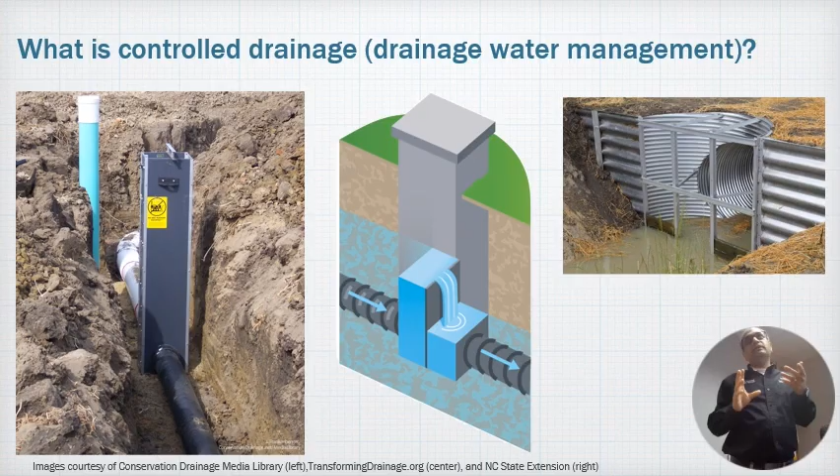In recent years, I think they're actually investing into it because they see the water conservation benefit. Something you might come across is that one structure at the outlet may or may not help. You may have to have a series of structures, and there are two ways to achieve that.

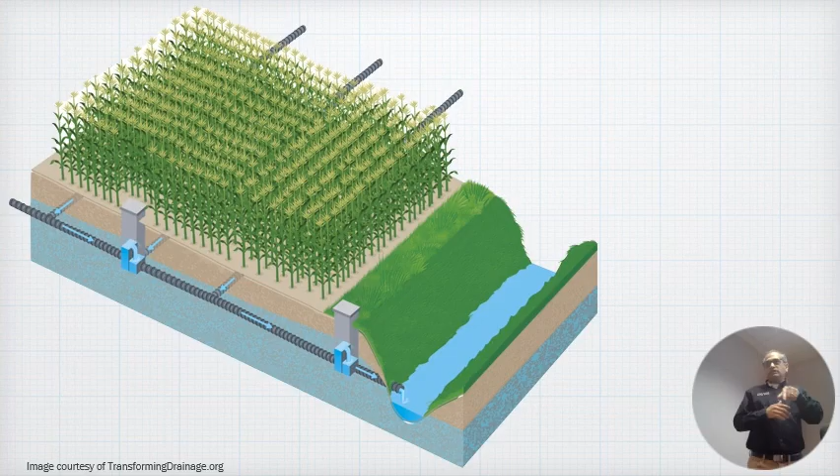You could use a structure, or you could use an underground device they call an inline water gate - basically a float-based valve system. So technically, in this slide, this did not have to be a structure sticking out of the ground. You could put an inline water gate and still achieve about a foot of elevation gain on the water table that you're storing behind it.

Does that make sense? Now, where are you talking at? If you point on the screen, I can't see where you are. Oh, it's not showing up. Yeah, okay, got the cursor - sorry, my bad. There you go.

This second structure - you must have a structure at the outlet basically, right.

Raise the outlet elevation to whatever depth you're wanting it. But if this ground is sloping, then you basically lose the benefit of that raised water level by the time you go up in elevation. And that's where you need to put another structure that would stack up more water behind it.

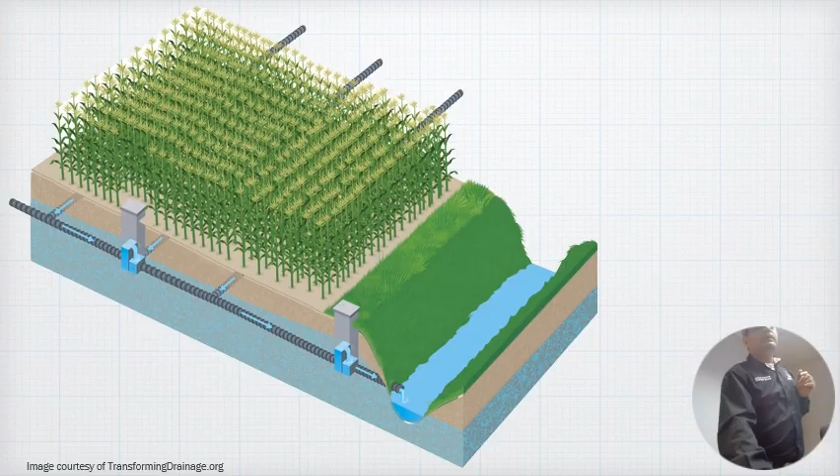To benefit this part of the field, instead of this structure sticking out, you could put a water gate here. Now the difference between a structure and a water gate is that the structure, you can stack up the boards to have like 2 feet of elevation rise. The water gate gives you only 1 foot, so you will need 2 of the water gates, but the advantage is they're not sticking out above the ground.

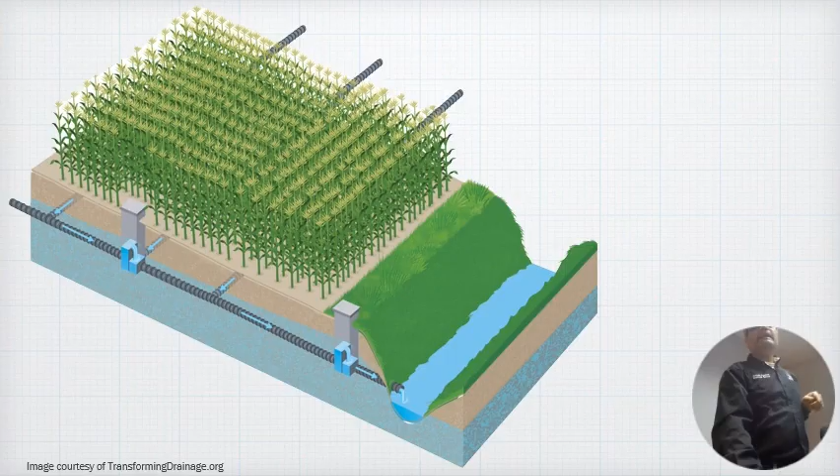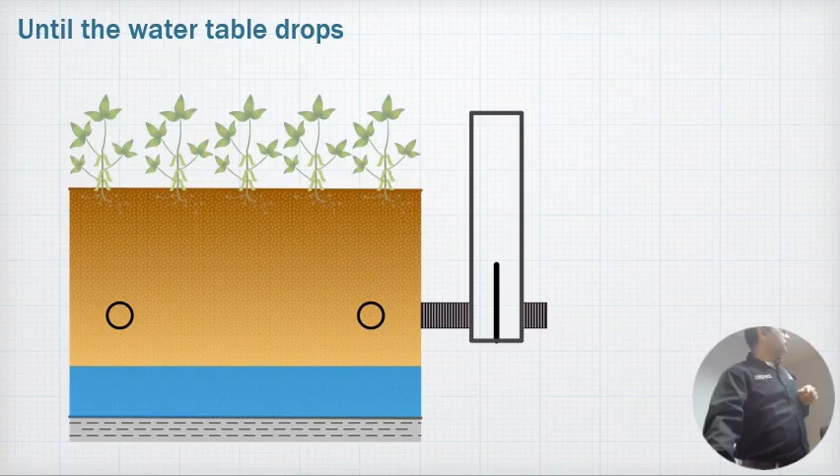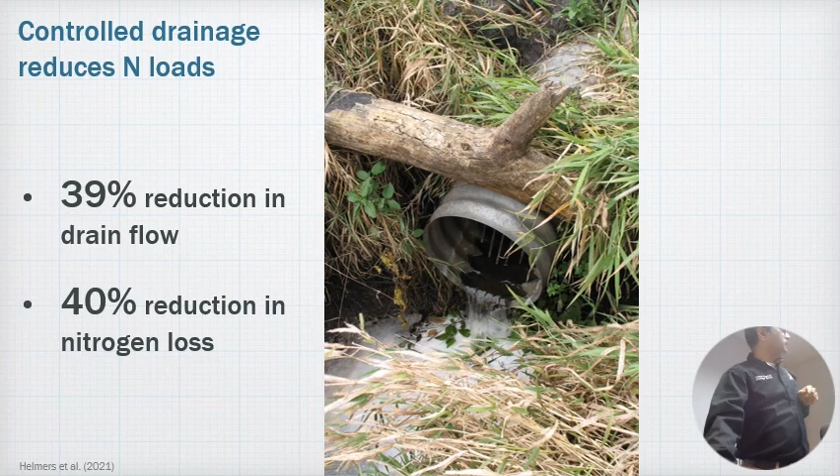And you'll see why I'm showing you that, because it's not always like you're always dealing with a field where the structure has to sit out at the edge of the field. Sometimes your main or sub main runs in the middle of the field, and how do you manage that?

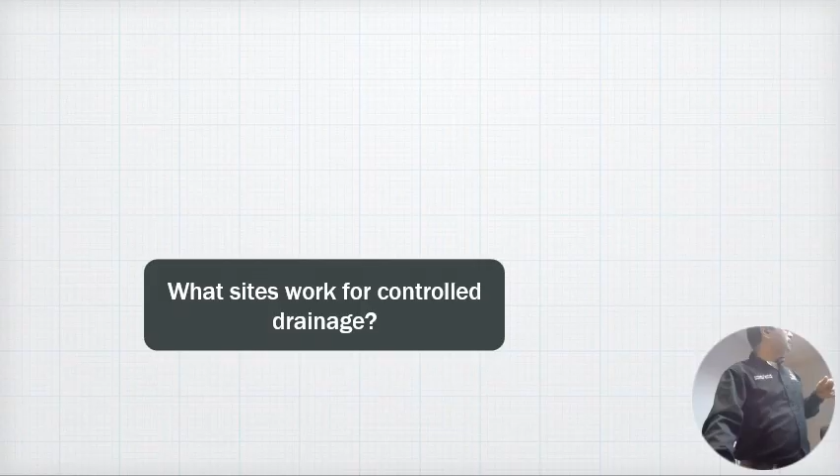What sites work, I think you already know the basics of it, but let's go through the list. You must have drainage that exists, systematic drainage that exists in a field for your water table to actually rise or go up and down. So if you don't have any laterals in a field, you're not going to benefit from controlled drainage. That's the first thing, but it's best to have a pattern drainage system.

Something to keep in mind is, do you have leakages? Old clay system that is hooked up to a different outlet or just sitting there. Imagine you raise the outlet and you have a leakage. It's not gonna store the water in the profile. The whole idea is to store the water in the soil profile, but it's gonna find its way out.

You have a big ditch right next to the field. Deep seepage, lateral seepage is going to take some of that water away from you. So you don't want to have a perforated main running parallel to a big ditch and then do controlled drainage on it, because then you would lose a lot more water to that drainage ditch through seepage, as long as the water in that ditch is lower than your field elevations, if that makes sense.

So there are certain considerations that you have to think about. It's about management, so we have to think about the management aspect. If you could put a structure here right by the road, that's easy to manage, hop off the truck, that's the right location to do it.

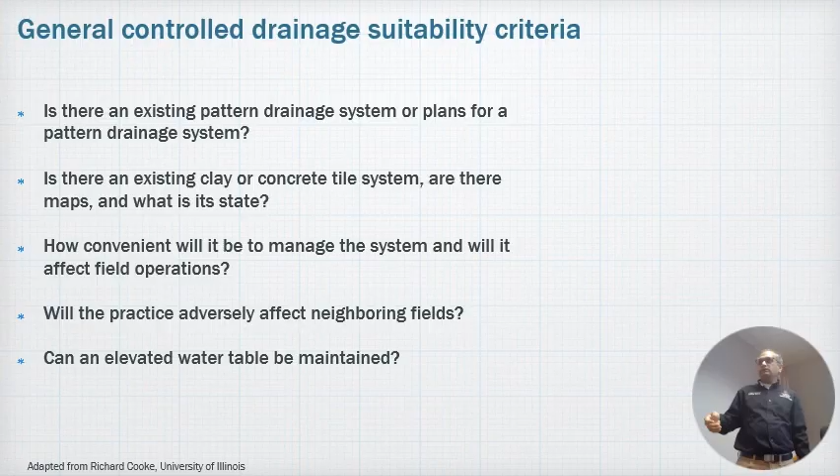And then you have to think about where that location could be. Main thing is, it does not have to come in the way, like when you're turning your combine or whatever, you're likely to hit that. And now there's the consideration of where it says to affect neighboring fields.

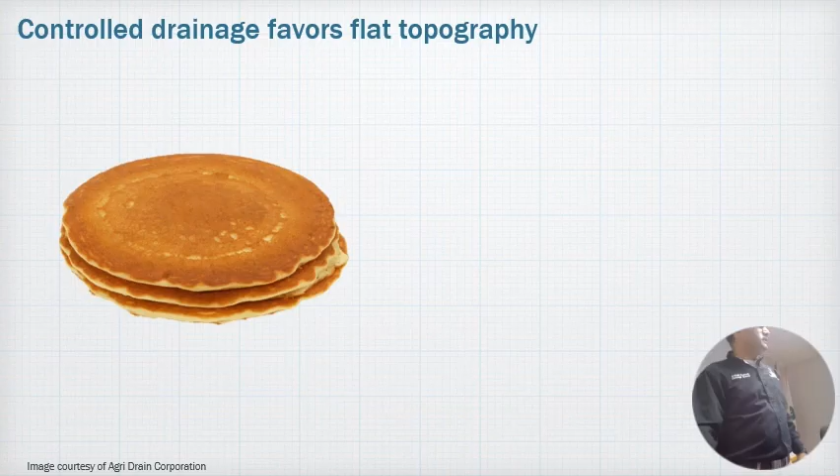Yeah, I'm listening. The neighboring field, I guess we got a main coming through from the neighbor field. So we would just leave theirs there and just go on each side of that, would that be ideal? That is a very good question.

Do you put a control structure on a shared main? My advice to you is to never put a control structure on a shared main, no matter how close a friend you've got there. We always recommend that if you have your own tile main coming in, or if it's not coming in, it's very easy to put a sub main in and then put your own control structure on there. Water is a very contentious issue, and tiling, getting rid of water, is even more. So it's better not to plug up the entire flow for you and your neighbors, no matter how high they are in the watershed. It just keeps your system safe.

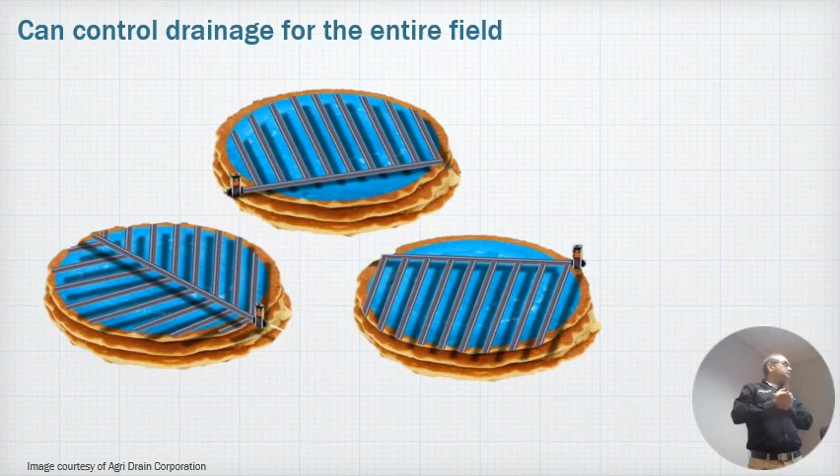Now, with the neighbor's main coming straight through mine, and then I put one on each side, well theirs really needs to be solid or non-perforated, because with me backing it up, my water is going to have a tendency to go to theirs. So that is a modification you will have to do if you have a shared perforated main, and then there is a control structure right next to it.

You will have to change all of that into a non-perforated section. Otherwise it would defeat the purpose, especially on the main, because that's where you're backing most of the water up to get to the laterals. That is a very good point. And then you don't want to have your main be perforated for a certain length.

From the control structure up, you also want to use a non-perforated pipe, because that main - sometimes you're relying on that main to be your drain pipe for that buffer. It may be easier to put another lateral, maybe split the spacing, put another perforated pipe, but keep your main non-perforated if you have another main right next to it that is perforated.

Think about this: a pancake field is perfect for controlled drainage - we have a lot of those. But a stacked pancake field is a different problem.

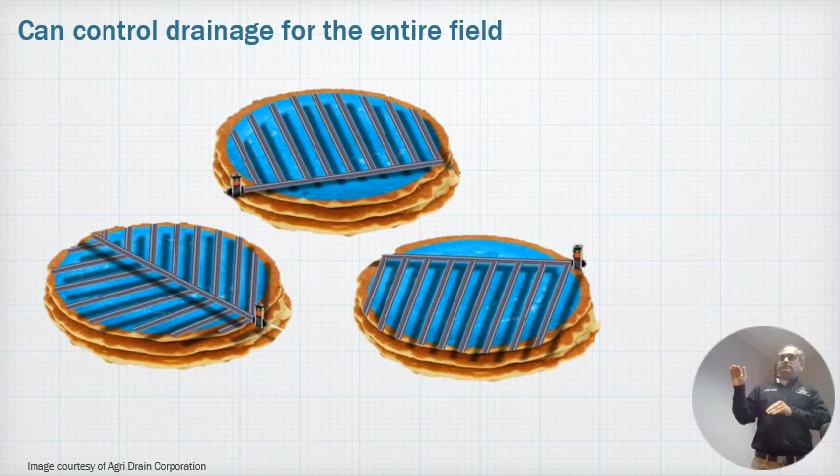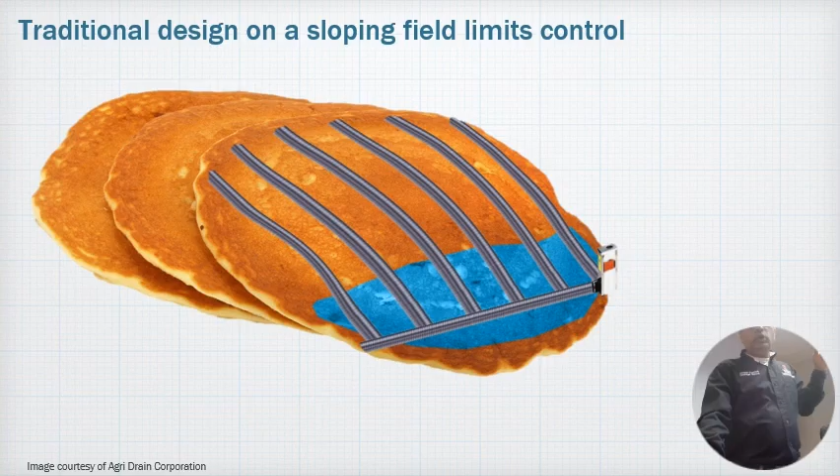That's when you've got to think about whether or not stacking these control structures makes sense. I'll come to the slope numbers shortly, but anywhere between 0 and 1% slope, I don't worry about it for the land. But you could potentially extend that benefit further uphill if you put additional control structures that individually manage these zones.

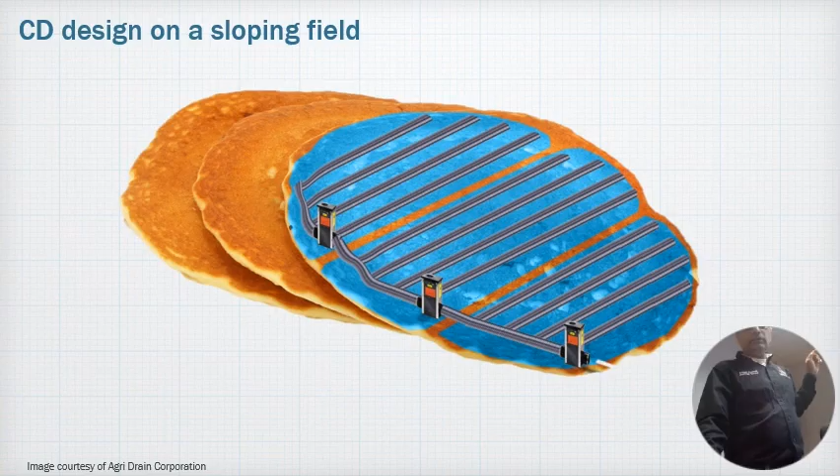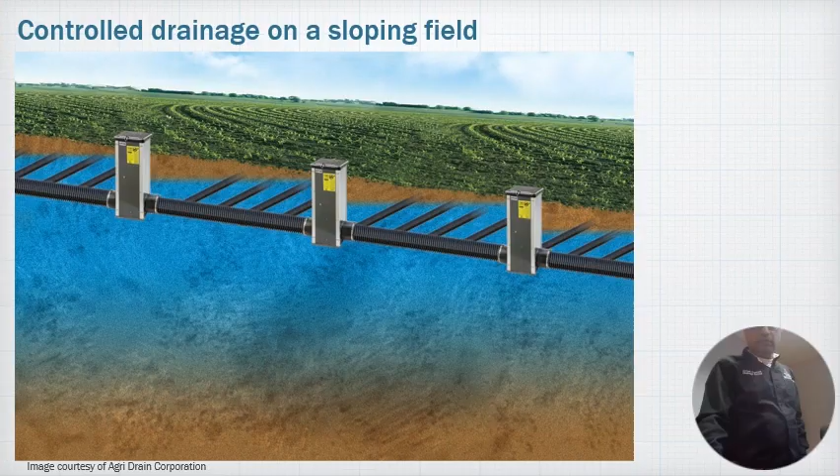I would not want to see a structure sticking out of the ground in the middle of the field. You could achieve it using a water gate - I'll show you that here. But for the pancake side, you could use the below-ground option. I think it may be here somewhere in the illustration. Look at that, there you go.

The difference is, it's basically an oversized pipe that allows you a foot of head. So you would have needed only one control structure here that would give you 2 feet. Instead, you need two of these, and they're much cheaper, but most importantly, they're not a hassle sticking out of the ground. Cost-wise it's all the same, and if you're going the NRCS route, it's all paid for.

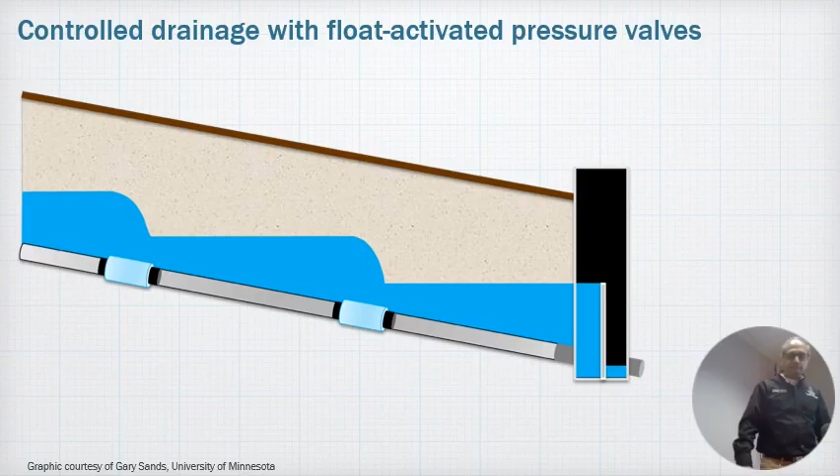And they do work. A lot of people think, oh, it's underground, what if it's clogged or whatever - I don't think we've seen that much of an issue with these, so it's pretty reliable from what we've seen.

As I said, at 0.5% slope, less than 1% slope for a field, you can easily put a control structure out there and see the benefit. The only caveat would be if you have sand veins or some kind of leakage - you've got to address that.

If you have a random clay tile - it's good for me because that part of the field I always liked to have it drain using that clay tile in a different direction - not anymore. You might want to address that through a systematic pattern, or hook it up with your existing system and disconnect it completely, destroying it completely. Otherwise, it's going to leak water.

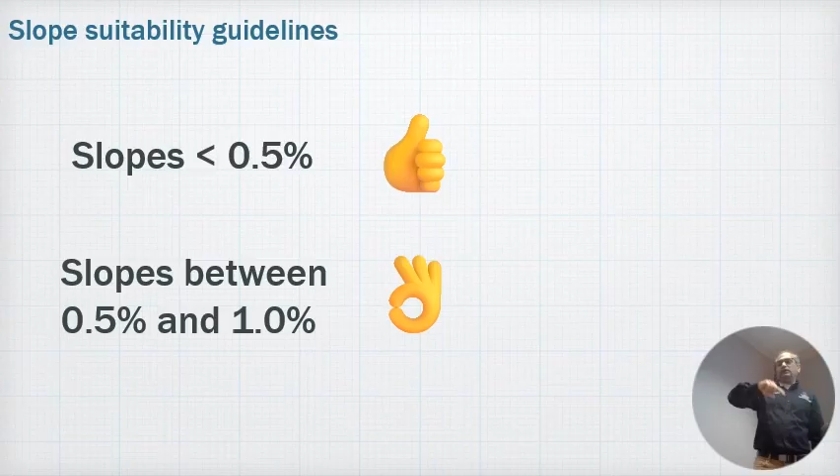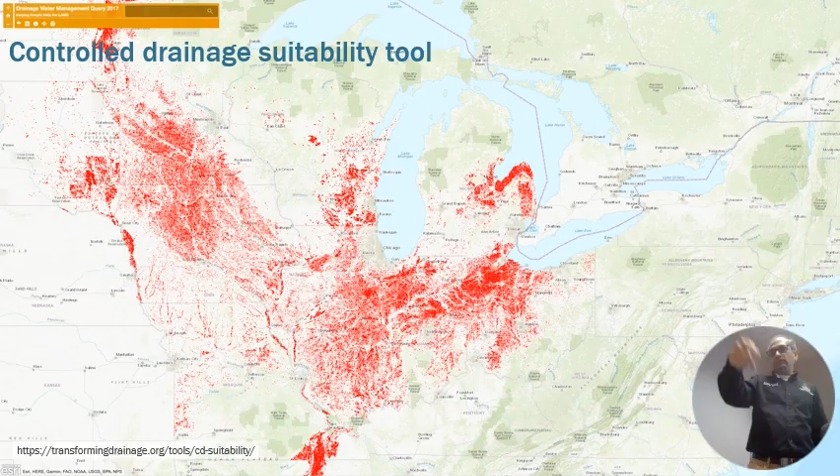A lot of the landscape here is suitable. There is a suitability tool on that website, on that handout, that you can easily see. But honestly, the best way would be to do your assessment, get a soil and water district person to comment on it, and then invest in controlled drainage.

Don't just invest into it randomly. Sometimes you may get into situations up in Fulton County - we see this a lot - where they have sand veins and still get paid for a control structure, but it's no use... I mean, okay, I shouldn't say that - they're not getting much benefit, but they are helping the environment.

As soon as you close that gate and stack up the boards and let the water stay in the soil profile, even if it hits a sand vein, it does wonders for removing nitrogen and phosphorus. On your profitability side, it does not necessarily provide that yield benefit. So the correct way of saying this is: you don't want to invest into this just because you want to make money.

If you're a more conservation-oriented person, you could think about it from that perspective - the benefit, if you're getting paid for that structure, is for it to work for water quality, and it's an honor system. NRCS is not policing you. The payment is not tied to verification that you're actually managing it. It's an expectation - H2Ohio requires you to manage it for 3 years after getting paid. I haven't seen them policing it. It's one of those things that, very American in my opinion, is an honor system.

I'm done harvesting. I have no use for that tile system because I need active drainage if I'm growing crops. I don't need drainage if I'm not growing crops. Shut that valve off by putting the boards in during the non-growing season. It's helping the environment, if you can keep that in mind.

Now, in the growing season, you're still just leaving the boards up part way. You're not closing it fully. The only difference is more aggressive. You'd go higher in non-growing season. The operation and management is part of this, but I'll just explain to you, and then we don't have to worry about the slides.

After harvest, you go back in, stack the boards up so that the water table, when it starts rising, can come up to about a foot within the top of the surface in the field. 12 inches below surface is what NRCS practice standard recommends in non-growing season.

Because you could bring the water all the way up to the surface, but then next time you have rain, you're going to see erosion. So that's why we leave about a foot of freeboard in the field so that rain, precipitation, or snow melt can soak up, find its way, infiltrate, and then bypass through the tile system. But 12 inches is ideal in non-growing season because that's when you have the maximum water quality benefit.

I'm a cover crop guy. I don't want wet feet for my cover crop as it's growing. The practice standard then modifies the suggestion. It says, as the cover crop starts growing, start lowering your water table. I made it simple: for Ohio, don't put it at 12 inches if you have cover crop. Set it at 18 inches. Your earthworms will be fine.

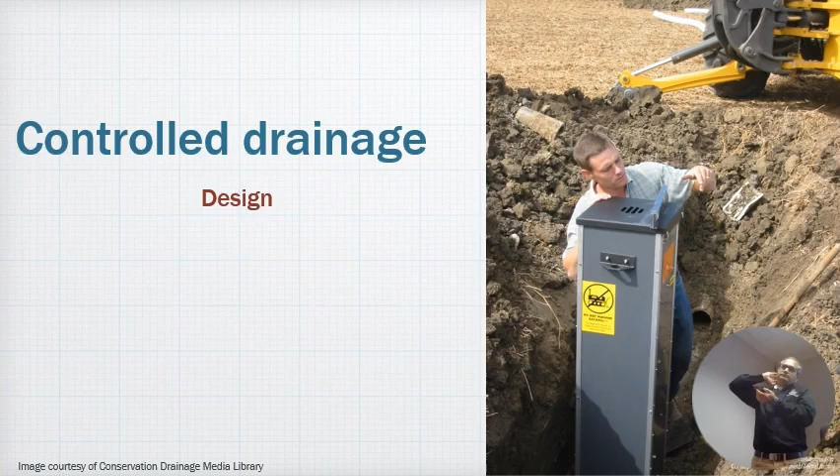With controlled drainage, you're bringing the tile depth up. So instead of going down to 36 inches in the first 48 hours, it's going to stop at 18 inches, or 12 inches, or wherever you set it up to be. Does that make sense?

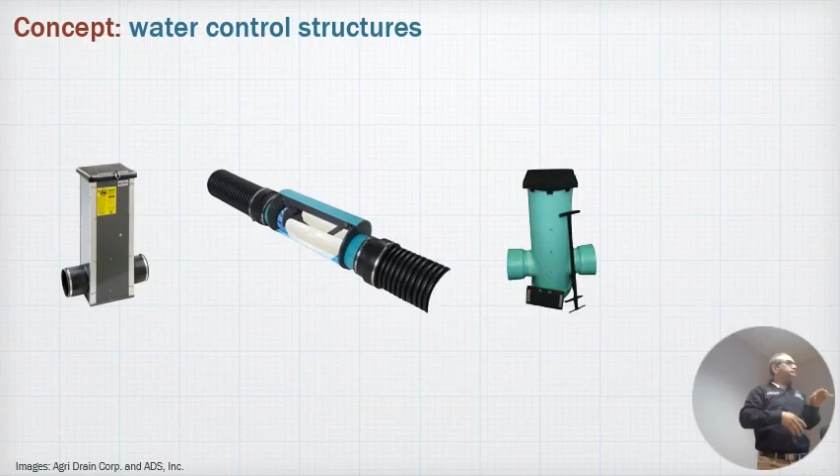Now there is an automated control structure that has come on the market. A typical manual structure like you've seen costs maybe somewhere between $2,000 and $4,000. You add another $10,000 if you want an actuated valve at the bottom that you can schedule to open and close, or react to water level changes. I have 15 of these that we're looking at as part of our research. I like it, especially for guys that have more than 30 or 40 outlets to manage. And who has time in April to go to 45 outlets and raise these boards?

And it's not easy. Tim, have you ever used these slide gates, the ones you try to pull up and down? Imagine all the soil pressure pushing on them. These things distort a little once in a while, and it gets very difficult to manage them because the slide gates don't help.

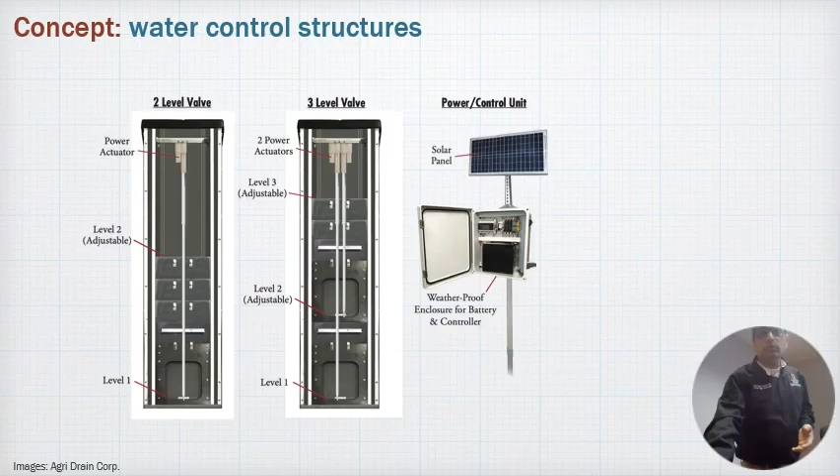So in that situation, this automated control structure is a good idea. And the good news is the NRCS payment will actually cover the additional cost for automation. So if you're going the NRCS route, go the full route and get the automated one. If you're doing the labor on your own, that's the best way to do it, because then you can charge your full labor on that payment program as well.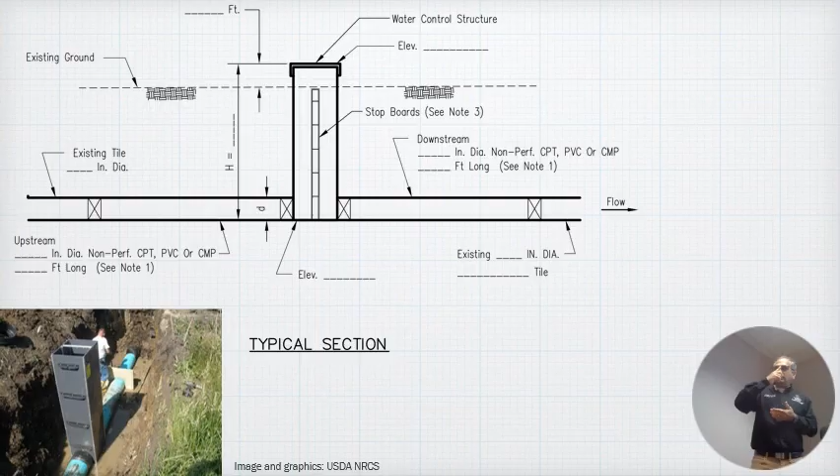This is a typical section - this is where I was going to talk about the non-perforated pipe. The standard says you should have a non-perforated pipe section on either side of that structure for about 20 feet. What that does is keep your actual outlet pipe safe. Otherwise, imagine you have a bunch of water on this side of that pipe - it's going to find its way closer to the pipe. It's smooth, so it's going to start piping, start scouring, and find its way towards the seepage lines through towards the ditch.

It will start carving out another pipe around your pipe, and eventually you'll see a failure. That's why you don't want any seepage directly going along the pipe, around the structure, and along the outlet pipe. The way to prevent that: number one, have a non-perforated pipe; number two, have an anti-seep collar if you see a risk of high seepage. In Ohio we have a lot of heavy clay soils, very tight clay, so we usually still recommend anti-seep collars, but there are ways to prevent that seepage - it doesn't have to be an anti-seep collar. I'll show you that.

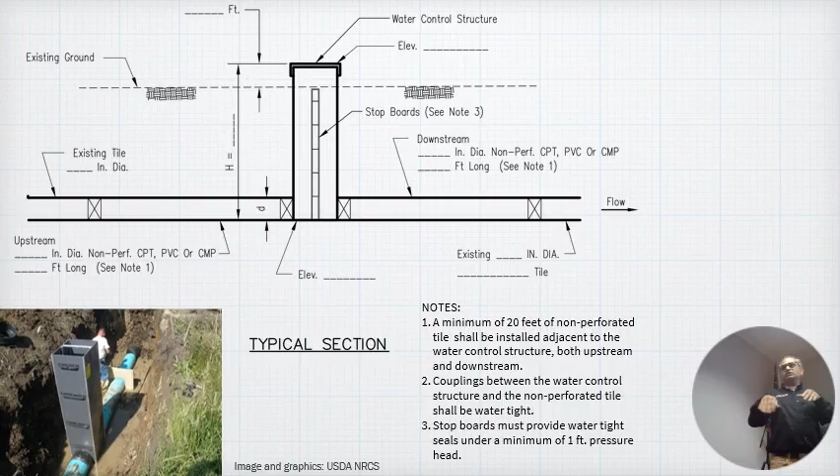Do you know what an anti-seep collar is? Have you ever used these? It's almost like a rubber membrane. You make a little sleeve, slice it in the middle, push your pipe through it. The opening has to be smaller than the pipe diameter, because the pipe has to pass through it. It's a really flexible rubber membrane that you're keeping there for maybe a 3 feet by 3 feet frame. What that does is stay snug with the pipe, and any water that's wanting to go along the outside wall of the pipe, it stops it and makes that water go around it. As soon as it's going around it, we're not worried about it. Then we're good, because it's preventing erosion around that pipe.

Now you could do the same thing by putting some bentonite around it. I've actually liked the idea of using bentonite around the pipe - put a few bags of bentonite around it, and that does the same thing, actually much better than the anti-seep collar. A lot of guys do not install these properly. You talk to an engineer from ODA, and they will always find a mistake that you made on anti-seep collars. You throw a bag of bentonite, they'll be okay with it.

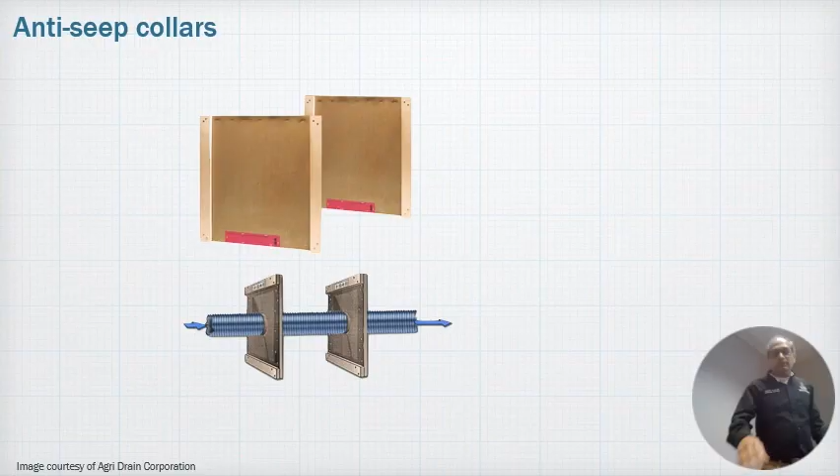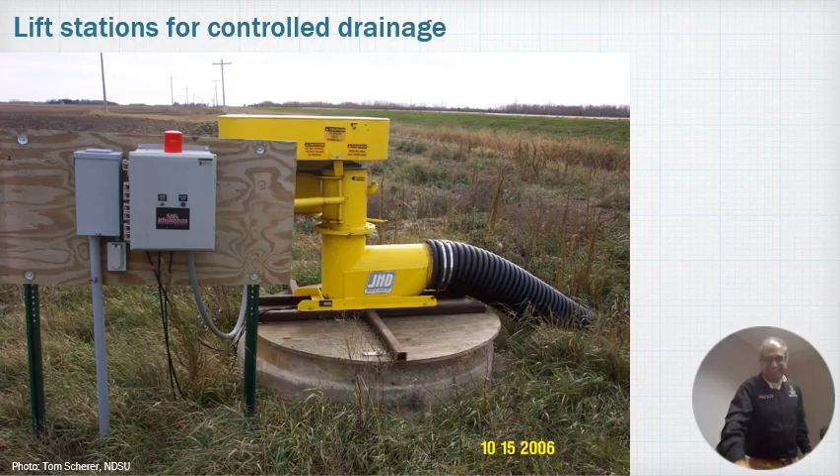Of course, sometimes I don't think you guys have that many pumped outlets here. There's a few around. But imagine, if you don't pump, it's controlled drainage - that's already done, that's simple. But that sump house could be your sub-irrigation as well.

Honestly, it's very easy to think about it, it's very easy to design it. My suggestion is to get someone else to design it for you initially, see how they are designing it, and then think about how many fields can be suitable. A lot of guys don't even worry about designing it - they just throw a control structure at the outlet if they know the field is flat, which is okay. The design comes in if you want H2Ohio payment or EQIP payment, then you have to have an engineering plan stamped and the paperwork to actually get paid for the structure and all that stuff. So typically this is a very detailed design procedure, and I think I'm running out of time already, but I can explain to you.

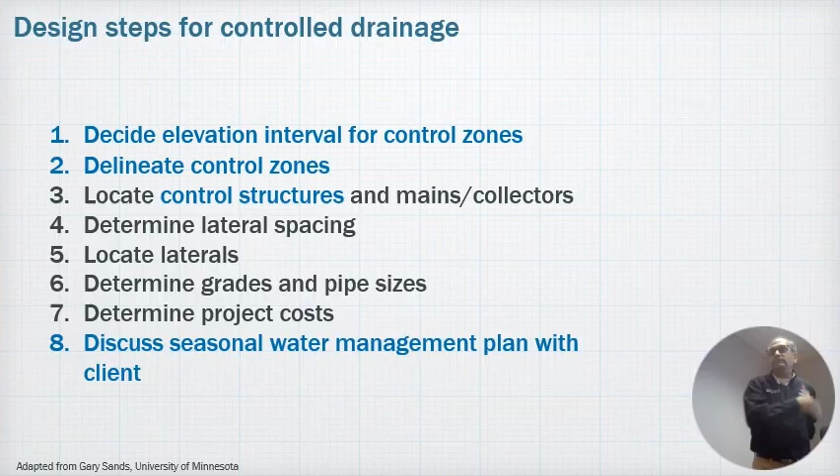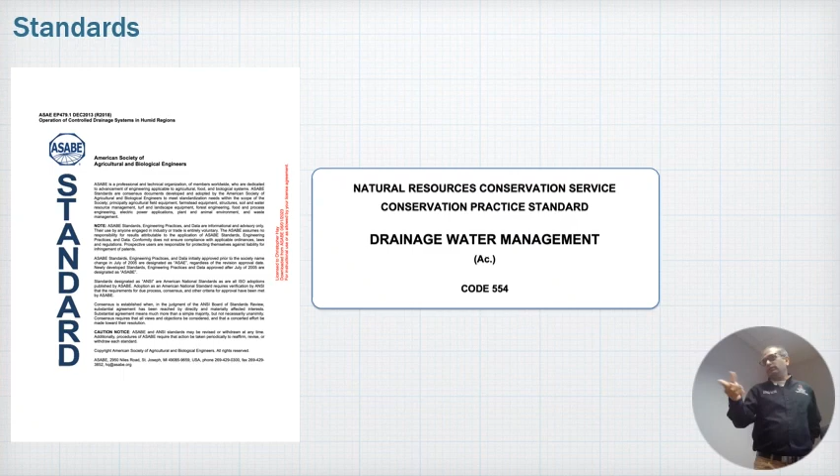If you think you have a specific field, we can just design it for it at a later point and go from there. If you come join us in March, you'll probably learn about it for about half a day. There, I don't talk about all this stuff - we give you actual examples to design it. This slideshow has some of those examples for design, but there is a practice standard that NRCS will share with you. I have given some website links that have all these resources there. If you have time now, you can look at it - otherwise, don't worry about it, we'll teach you that whenever the time is appropriate.

But a lot of people think that controlled drainage design is just this, controlled drainage design, and that's where they go wrong. You gotta think about this when you are thinking about a new tile system. Okay, so is this visible? Can you make sense of it? Okay, very simple.

If I'm a conventional drainage contractor or a farmer that does not want to deal with having to maintain a specific grade and having grade breaks and whatnot because it's going up and down in topography, my best choice for a design is to start putting laterals that go downhill. That way you're maintaining your 3 feet of depth as you're going down slope. No brainer, right? The map on the left is designed that way - every tile is going downhill, down to an outlet, down to a main that is north-south. This is a field that is suitable for controlled drainage, but the tile system made it unsuitable for controlled drainage because now you've got laterals that are going downhill. They are at the bottom of that stacked pancake.

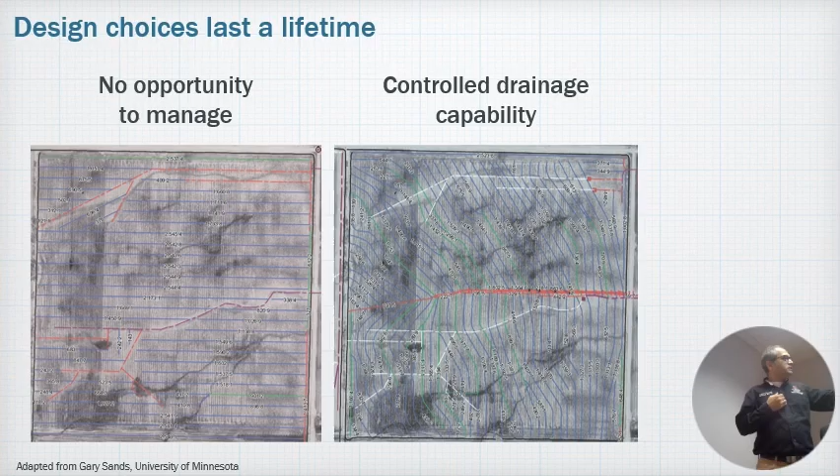When you're going downhill and the laterals are intercepting the flow of water, that's the best situation you have. So the design on the right has been modified with controlled drainage in mind. You don't have to go crazy on those turns - you could basically draw straight lines on your tile design, but the key is you want to be parallel to the contour lines, not go across them, if you're interested in controlled drainage on a field with more than 1% slope.

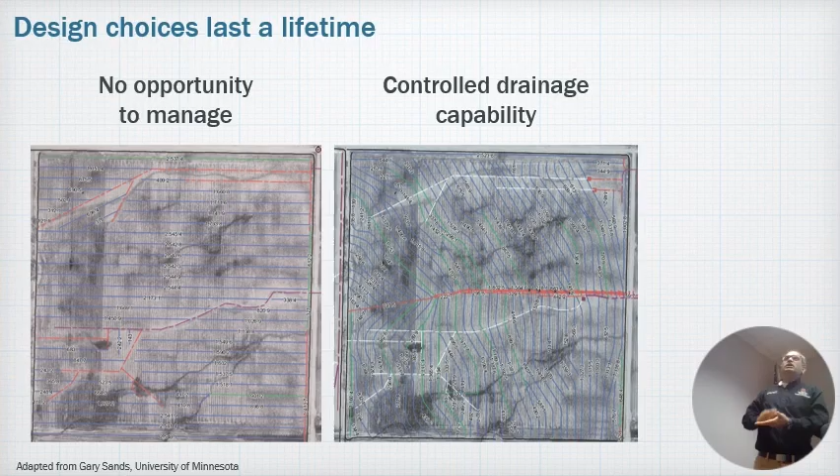Does that make sense? On a flat field it doesn't matter - if you've got less than a foot of fall from west to east in the field on the left, that existing tile system will work. Remember, we want to raise the water table by about 1 to 2 feet, so if you have less than a foot of fall in the entire field, who cares.

Okay, so over a decade, with those two systems, what would be the projected yield increase for the one that has the controlled drainage structures in it? That's a good question - would you see a difference in yield benefit over a decade from a system designed one way versus the other? Short answer is no.

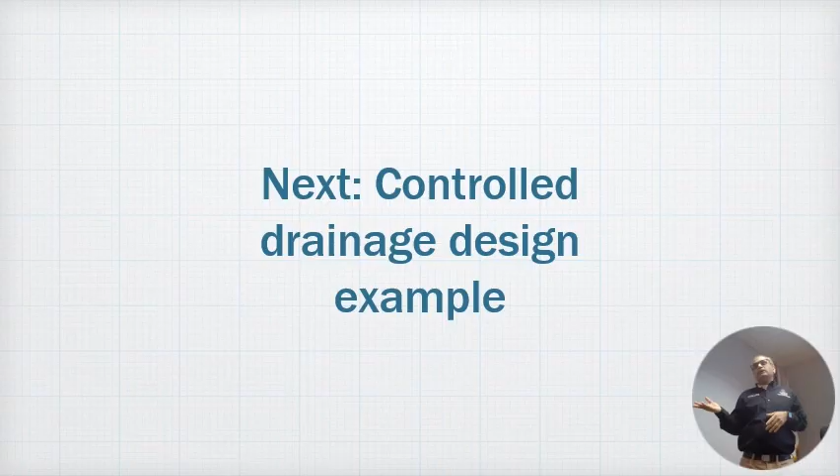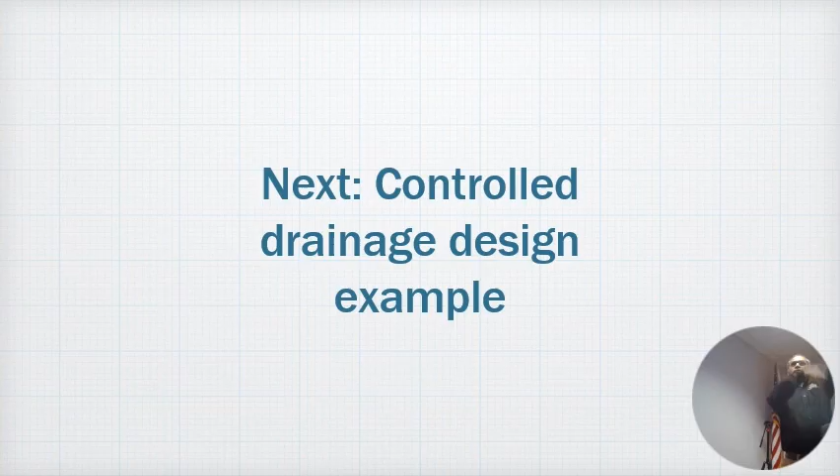If you designed it intensively enough that the entire field is within the zone of influence - I never used this term before - the bottom of the pancake where it was blue is called the zone of influence, because when you raise the water table by 2 feet, it only goes so far before it falls below the tile lines.

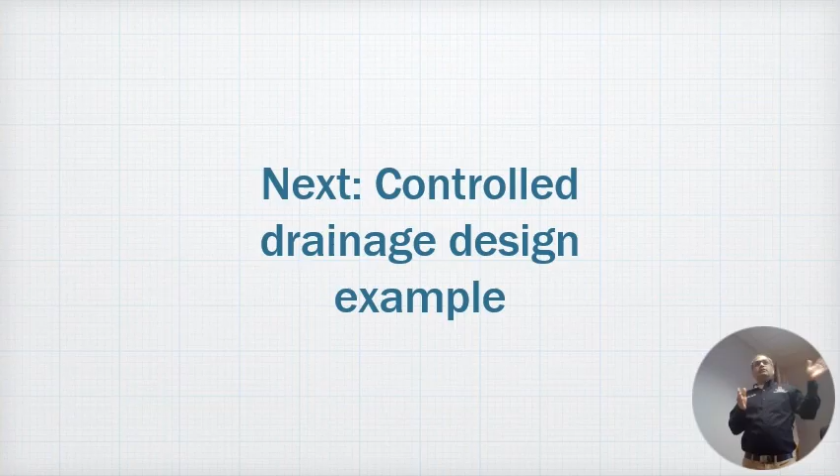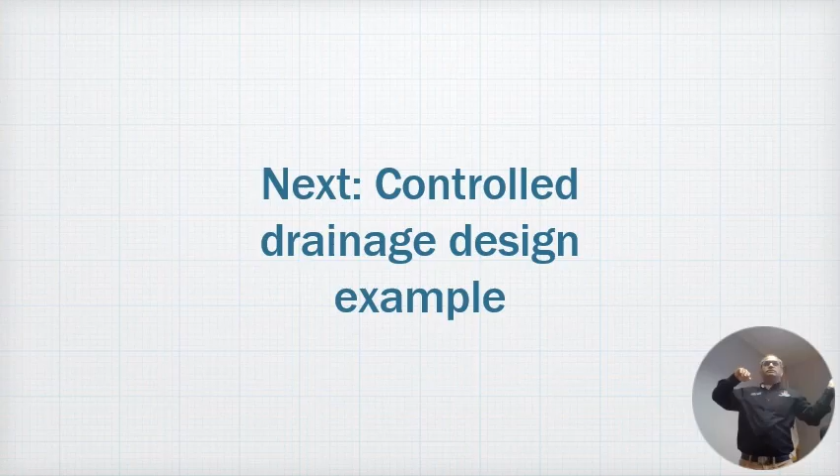So that's the key. If, by the design, only half of the field actually benefited from the raised water level, your yield benefit is coming from only half of that acreage, versus the entire field being managed with controlled drainage where a lot of your benefit comes from the entire field. That's the difference - it's simply a matter of the number of acres, not whether the crop would be better with this layout versus that layout.

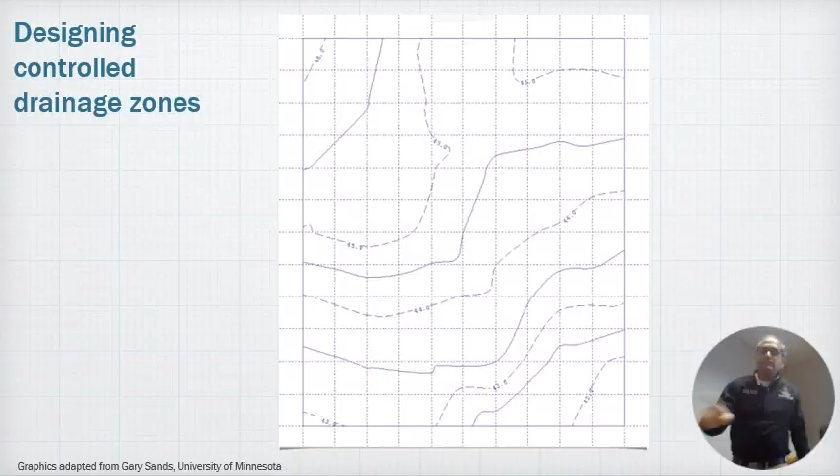Okay, I'm going to run through these slides because I'm not going to show you how to design it - you have to pay me money to show you how to design it. I'm sorry, well, I forgot this is being recorded.

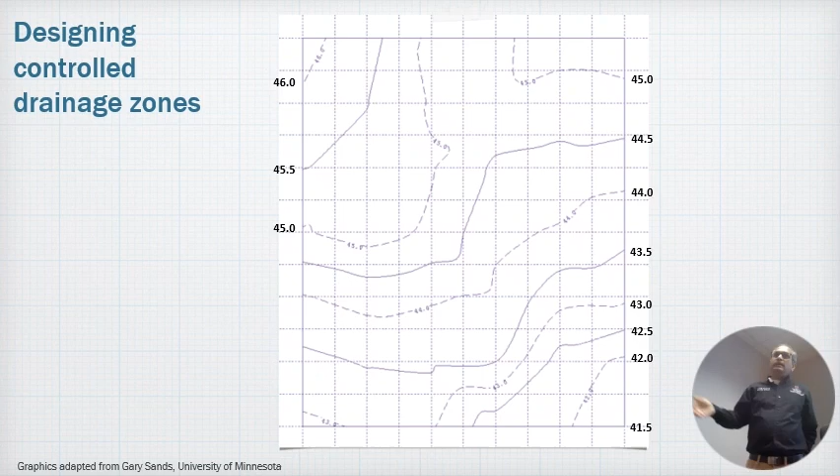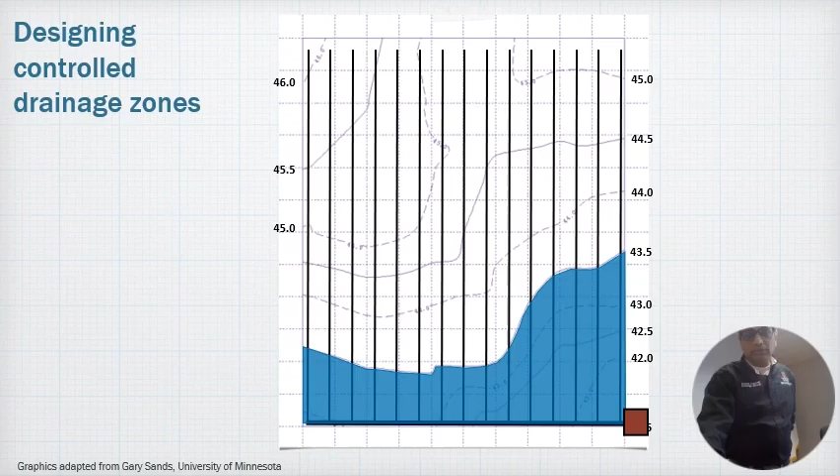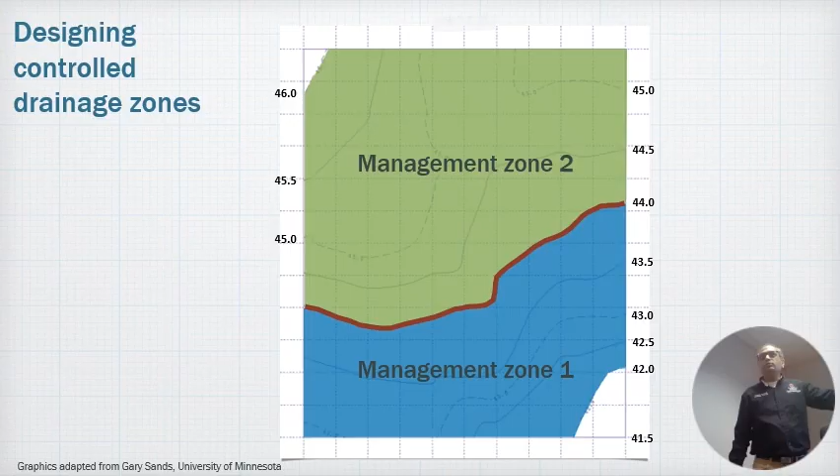Management zones - you understand how contour lines work, so you can see there are different management zones you can create in your design. In this design, they didn't even worry about the first contour line. The outlet would be at 41.5, and they don't worry about that little zone there. They want to put a control structure starting from the first contour line into the field, because that gets them another foot of elevation control further up.

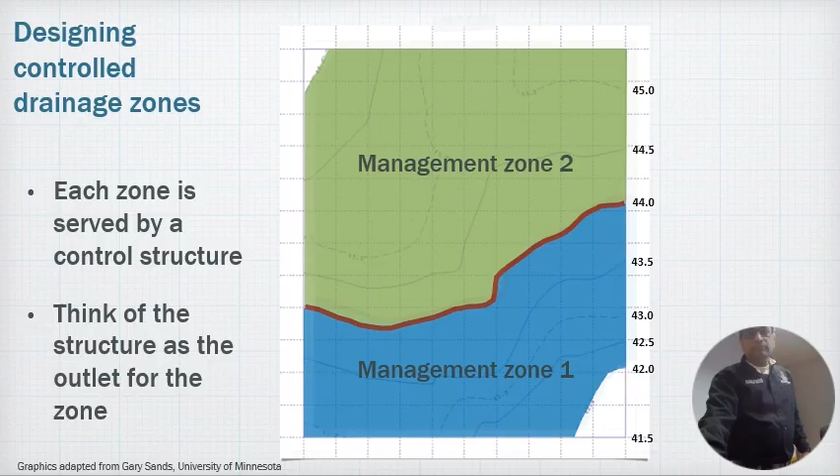I'll show you some of the locations. See, if you put a control structure out there and there, then you get the blue and the green for the management zones, and here is a tile system you could design around it. So it's pretty straightforward in a way, but you have to think about contour lines and where the zone might be before you put a layout.

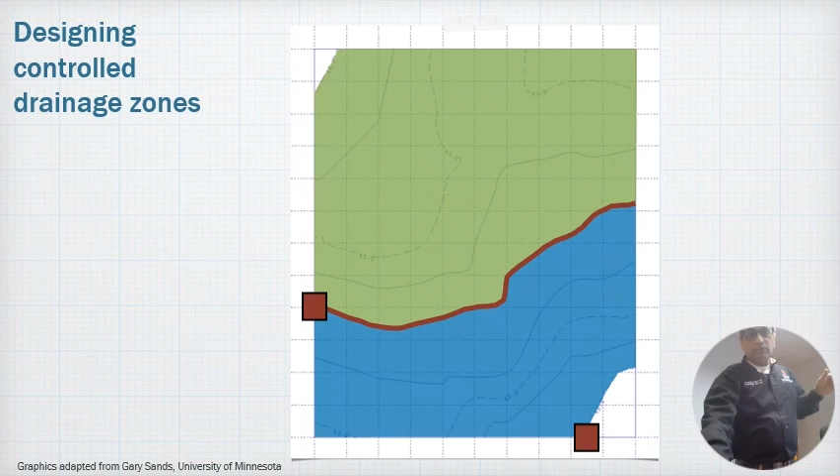So that's the only nuance - in a drainage design procedure, you don't just take a contour map and start drawing lines. You have to think about where the control structure might go. And as I said, that gray zone is not ideal, so we don't want to manage that. So that's the actual design where you put a control structure at the right location, and that gets you much better coverage than the previous example.

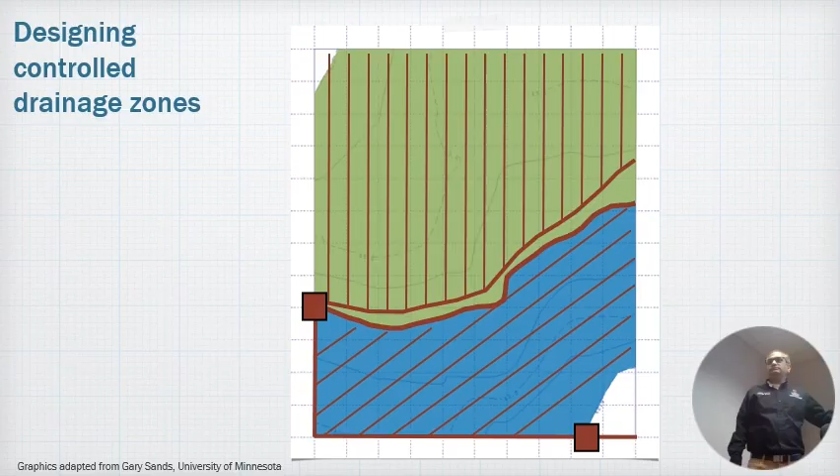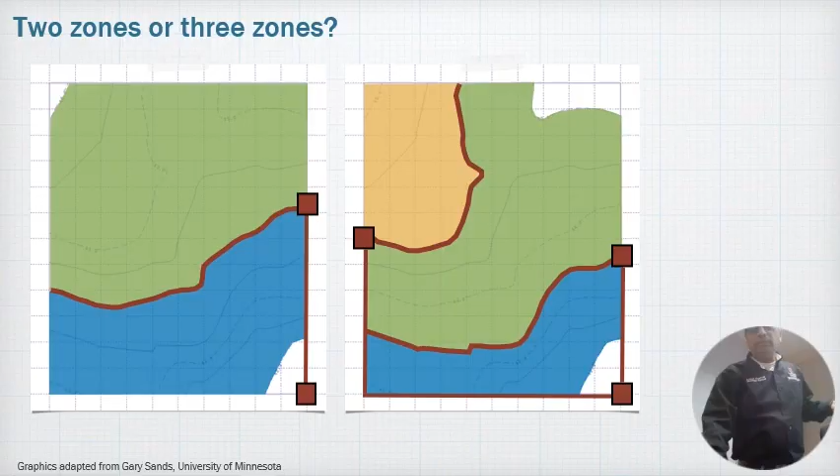There are many ways to design these things. If you're an artist, this is where you can get more creative. If you're a farmer, just be more realistic.

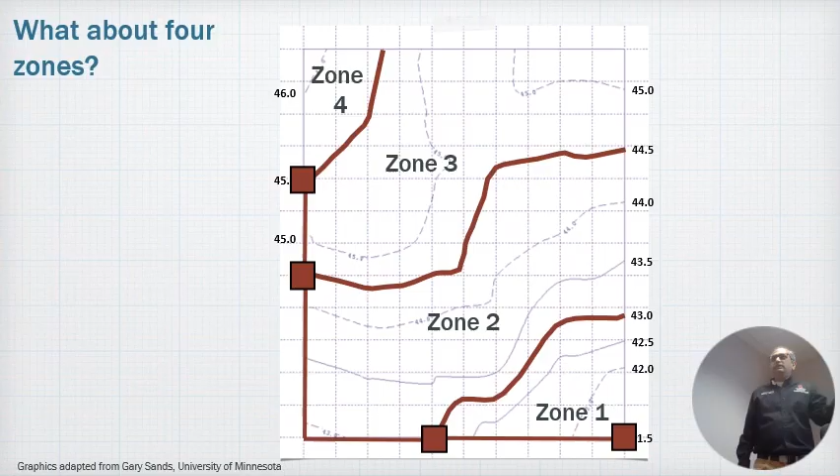If this was for Vinayak's university research, I could bring in funding to pay for 4 structures and get it all done, and get my grad students to manage them. But do you want the hassle of managing 4 structures just for a piece of 20 acres? Probably not. But for 100 or 200 acres, yes, definitely.

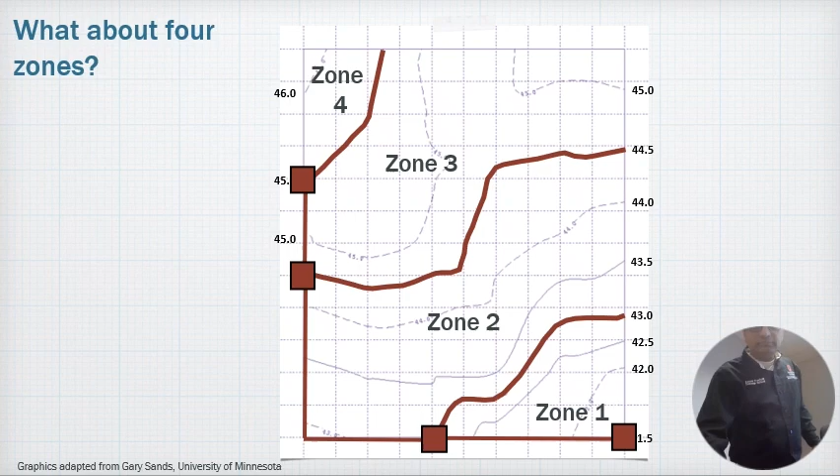Construction process is very simple. I already explained you have to dig up the existing main, retrofit it with a non-perforated pipe, and make sure you stop your seepage. All of this comes from the NRCS standard, and there's a construction standard you can follow easily. If you know what you're doing on a tile installation job, you cannot go wrong.

The most important thing to think about is this is a 6 foot, in some cases 8 foot tall vertical box sitting there. Your backfilling has to be absolutely perfect for it to stand in position. The moment it starts shifting, leaning one way or the other, it's also moving your outlet pipe with it. Some of that is adjusted by having a rubber coupler, those Fernco couplers on either end, but shifting still causes trouble. So backfilling is the most important part.

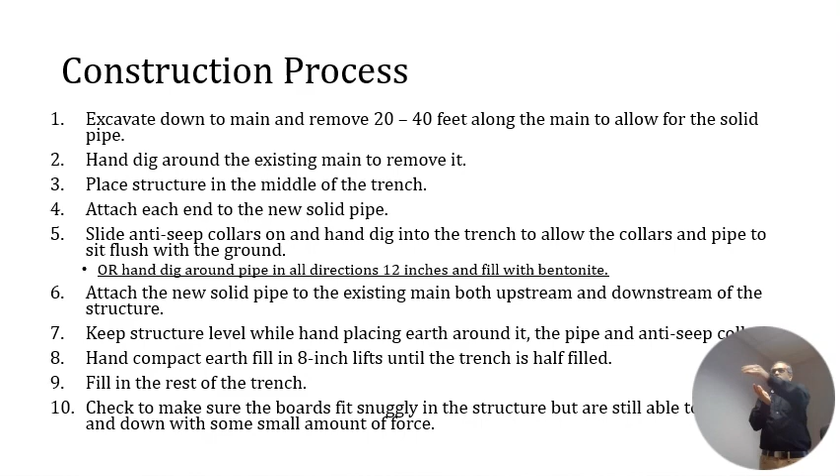The structure has to sit on a firm base. Remember your tiling basics — even your pull-behind plow, look underneath it, has to make a triangular notch for the pipe to sit in, because the plastic pipe gains its strength from side support. When installing outlets, if you have a wet or soft bottom, you've got to put gravel underneath. You need a firm bottom for the structure to sit, and if you don't have one, you have to make sure you provide the appropriate base.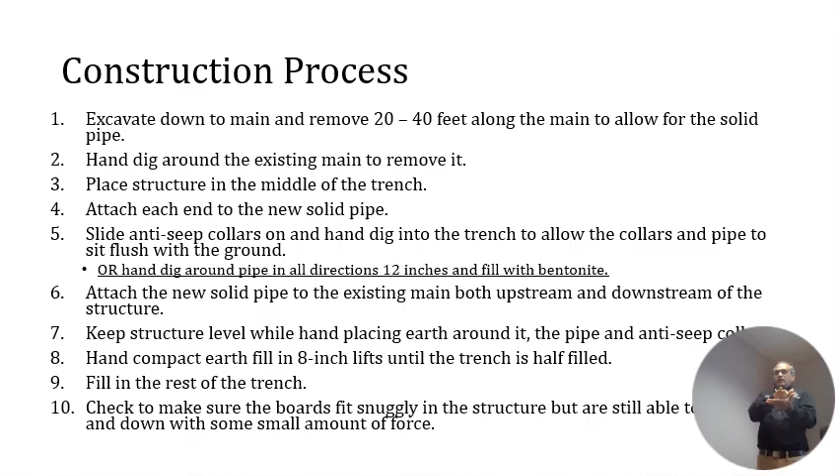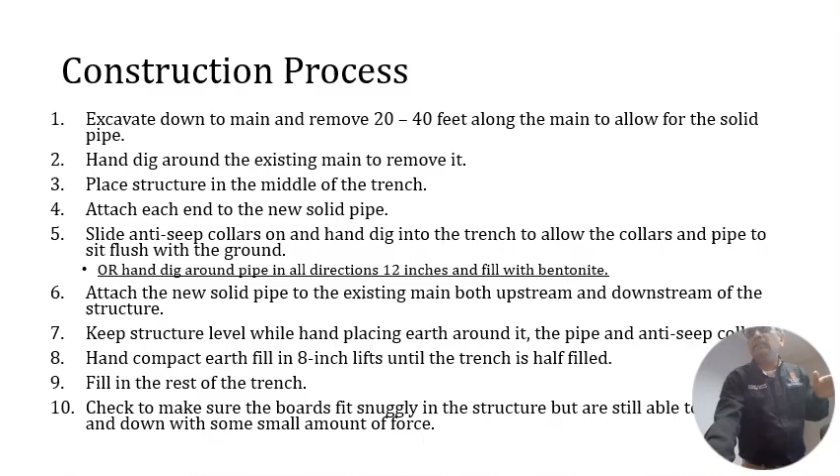There are all these considerations. You're not going to remember all of it, but when you install it, if you have a problem, talk to your soil and water guys or someone who's done it — especially about the mistakes they've made — and then you'll know.

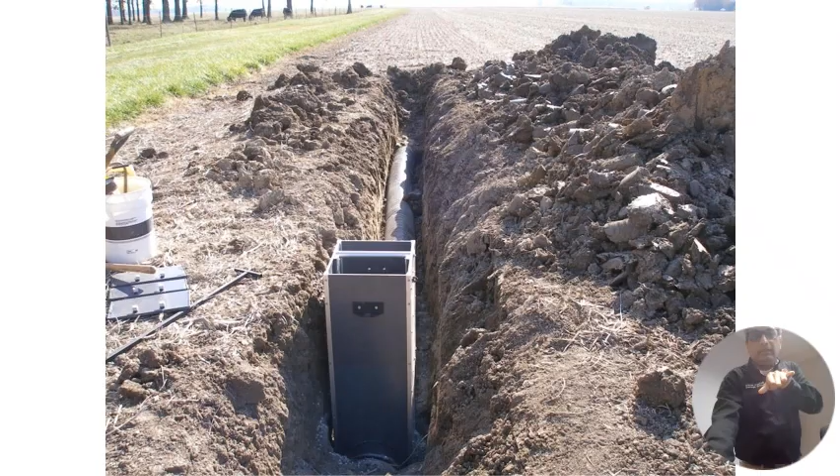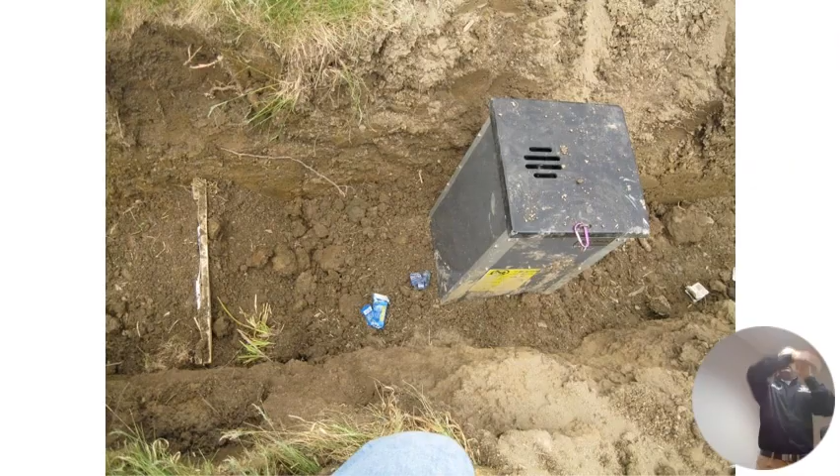So, very simple — this is the installation process. You see the trench being dug and the structure being installed in a groove with a firm bottom. This is good installation. You need to make sure it's level and vertical, and the pipe has to maintain the flow line — you don't want a dip. So make sure you maintain it that way. Backfilling, as I said, is very important.

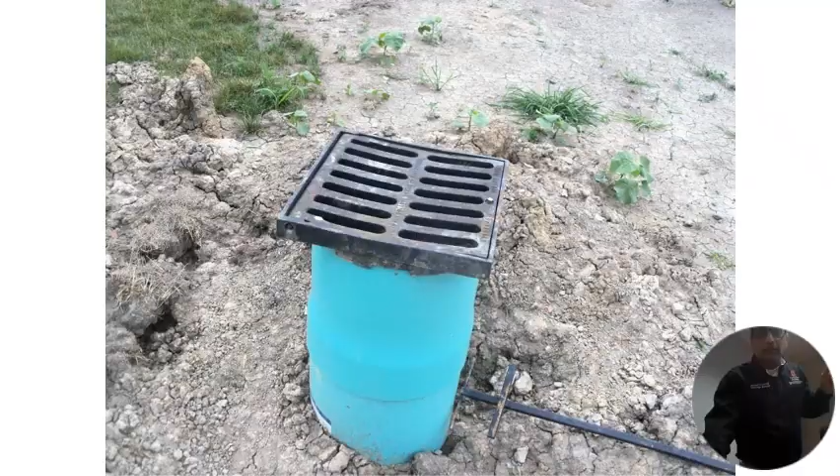The anti-seep collar is a nightmare, but it's important. I think I've explained the management enough — I'll just show you a graphic that shows the seasonal management.

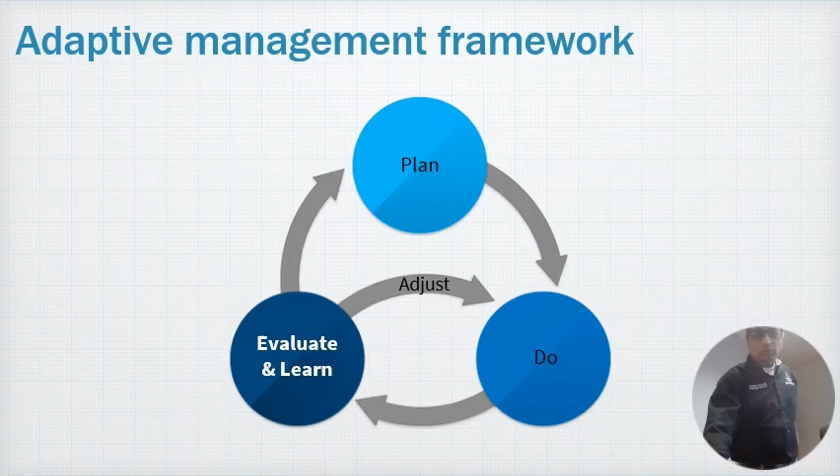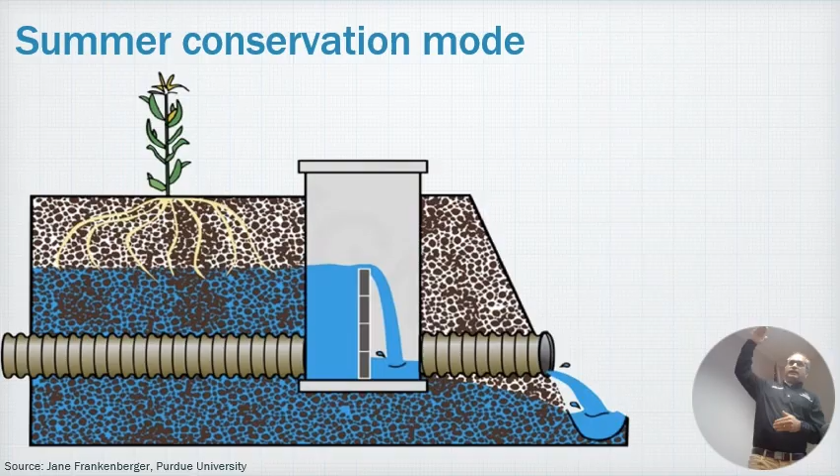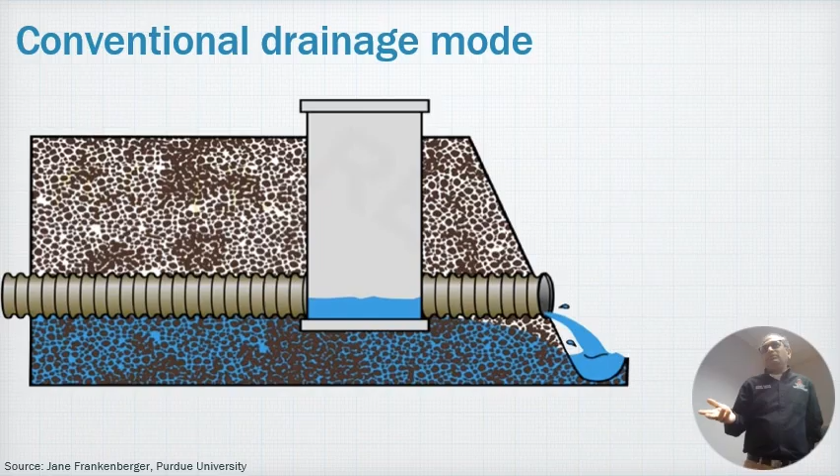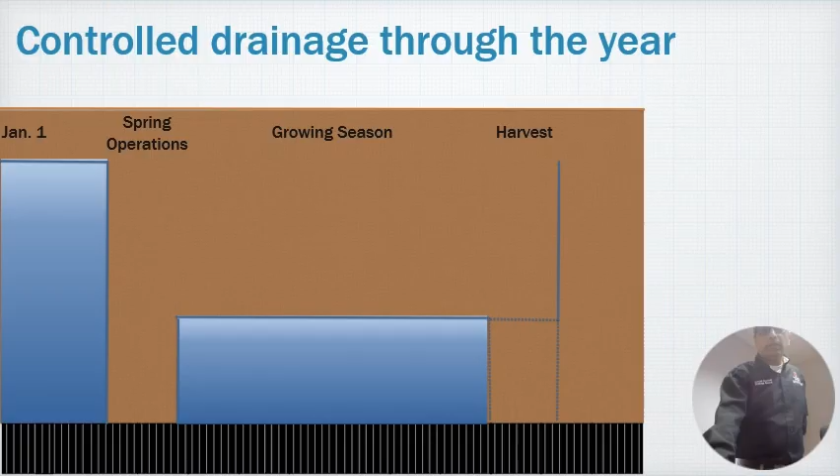So looking at the whole year, this is consistent with what I recommended earlier: in your non-growing season, December, January, whatever that period is, you have the boards stacked up. The top of the brown shading is the ground surface, and about 12 inches below that is your aggressive management level. In growing season, you want to start at the elevation you're comfortable with. If you manage to store about 12 inches of water above existing tile drains in your first 2 years, I'll give you a medal, because I like this practice. After that, you can use it however you want.

When you have no idea what to use as a cover crop and don't trust the decision, start with cereal rye — you can't go wrong with it. Same thing applies here.